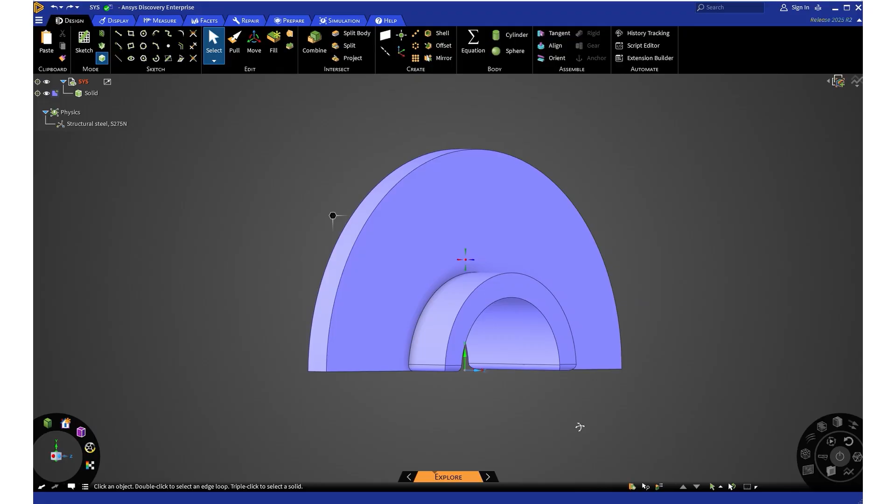In this tutorial, we are going to look at the plastic deformation of a curved beam. Here's our solid member, and we are going to fix one side and apply a moment to the other side to determine the maximum moment that can be applied before the system becomes a plastic hinge, or fully plastic. This is very similar to the problem defined in the textbook Advanced Mechanics of Materials, 6th edition, by Arthur Boresi.

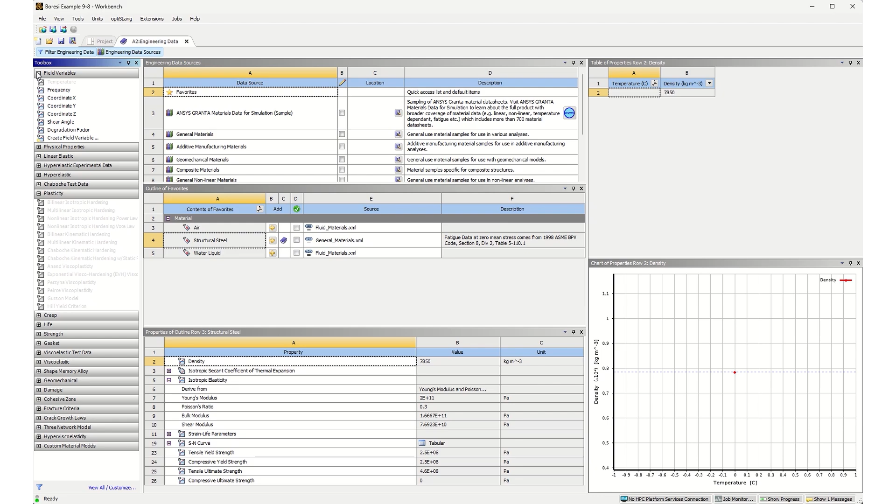To begin, we open ANSYS Workbench and drag and drop a static structural module into the project schematic. Then we double click on engineering data, and I'm going to use steel for this, so I click on steel here. If I want to go to engineering data sources, I can click on that and minimize these windows.

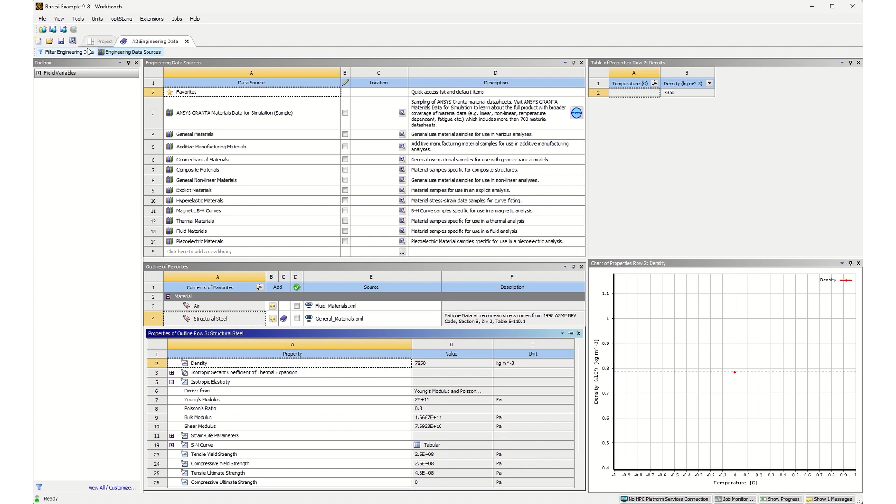You can see that structural steel is the default, and I can slide it and move it where I want. These are the properties in the structural steel. If I want to go back and use the structural steel I've already created, I come back to Filter, unclick Engineering Data Sources, and click on my structural steel, which is the one I have already started to develop.

You can see here that I have inserted a bilinear isotropic hardening model. You do that by coming over to the plasticity models, clicking on it, and dragging and dropping it into the properties outline window.

This I used initially. What you do here is click on the tangent modulus type and select plastic, which is the default. Then you enter the yield strength, matching the tensile yield strength down at the bottom, 2.8 e to the 8. For an elastic, perfectly plastic material, you enter a tangent modulus of 0. This tangent modulus is essentially the slope of the stress strain curve once you've passed the yield strength, so for an elastic, perfectly plastic material we want that flat line, and 0 gives us that flat line.

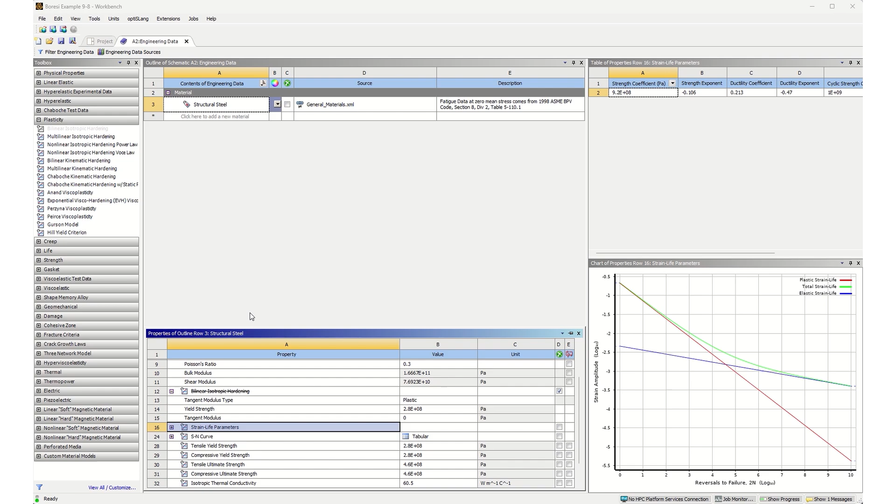If I wanted to go back and use the other one, I could click on it and delete it, or come down to the bilinear entry, right click, and delete that one instead, making it gone. Inserting it back in, I come to multilinear and drop it on, and you can see it shows up with some question marks.

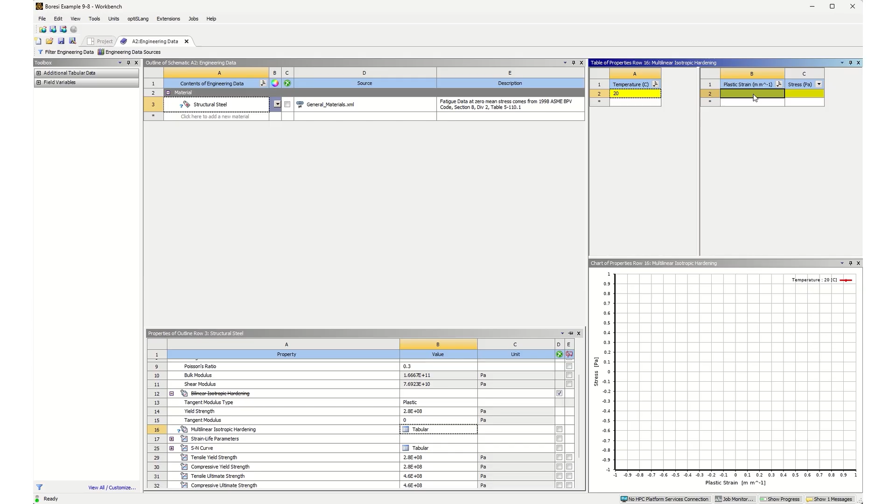Here's the table data, so you click on tabular data. I'm going to enter a temperature of 20 C, then define the plastic strain module. At a strain of 0, I set the yield stress to 2.8 E to the 8 pascals. Then at a strain of 0.1, I have this occur at the yield strength as well, so I type in 2.8 e to the 8. Now I can put one more point in at a very large strain, say 5, and enter 2.8 E8 there too, giving me a little table for my multilinear isotropic hardening.

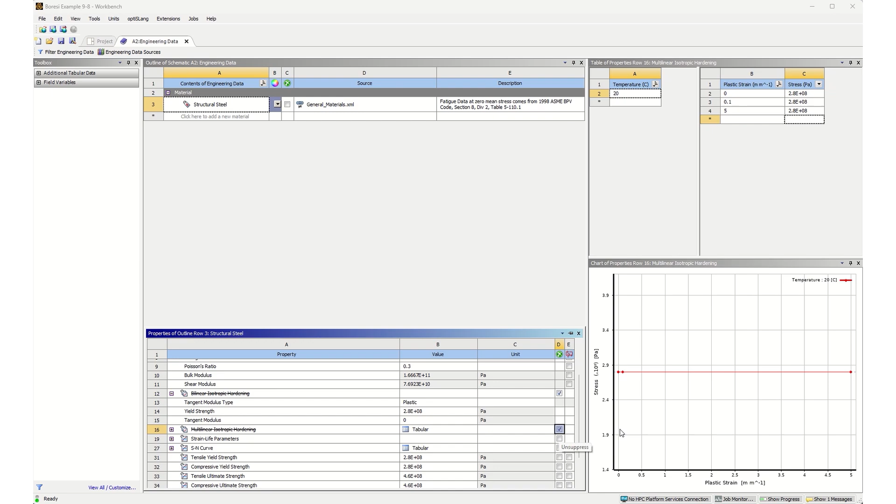You can also come over here and, instead of deleting it, just check mark or uncheck it. Placing a check mark in this column wipes out that module. Since I'm going to use this multilinear analysis and the multilinear model that's been plotted here, I'll go ahead and uncheck that other one.

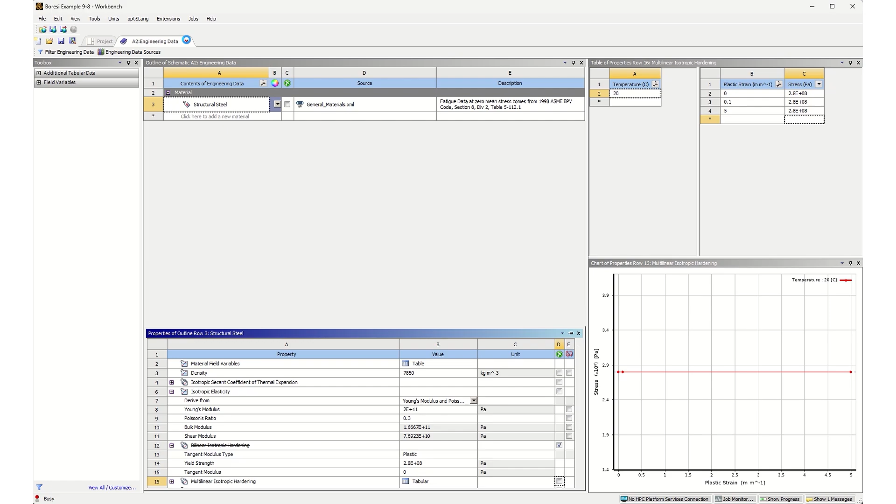Then make sure your other properties are set how you want them. Oftentimes you won't have a compressive ultimate strength, and you may want to enter that in. Other than that, that's about all we need to do in terms of materials. I'll come up to engineering data and close that window, and you can see now I need to resolve or update my model, so I just click update, which will refresh the screen and give me the data and solution I need.

Before we do that, in general we need to create our geometry. To create our geometry, we double click on geometry and ANSYS will open up ANSYS Discovery, and we need to build this beam. So to show you how to build that beam, I'll delete this one and rebuild it.

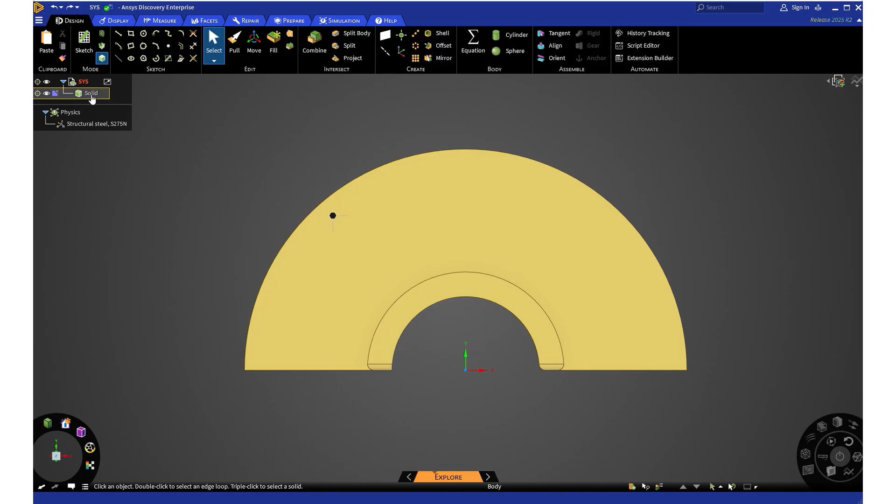To delete the beam, I can come over here and right click on solid and come down to delete, and it deletes the body.

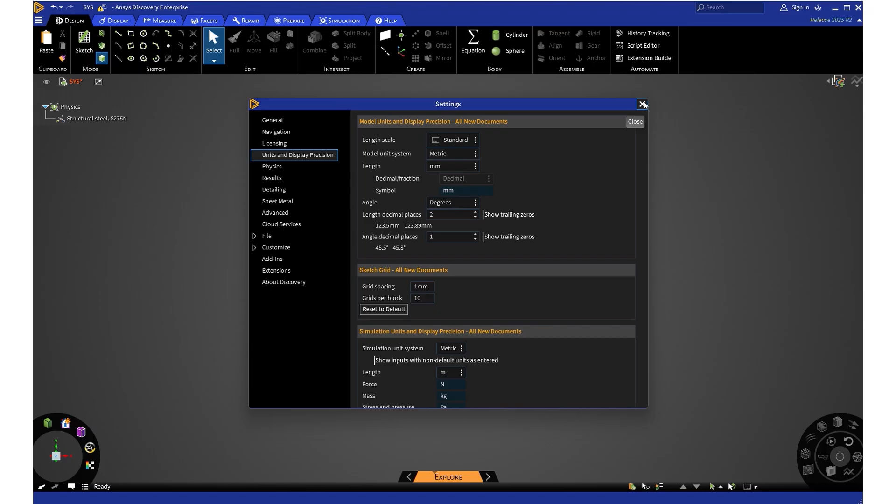To create this body, I will come up to sketch mode, and the first thing you want to do is make sure your units are correct. If you click file, then settings, then units and display, you can see I'm using metric units with length in millimeters, and that's what I want to use. That sets up the default for all new documents. Now for the document you're in, come down here and click on this icon, which sets the model units for the specific model you're dealing with. So here I'm using, again, metric.

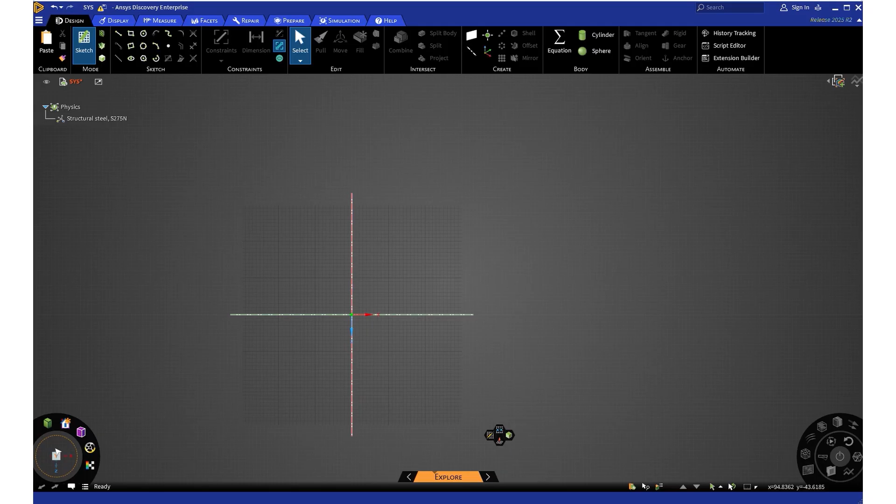Now we're ready to start to sketch, and it's often good to see the sketch plane. If you click on sketch mode in the sketch plane, you can see these sketch planes. For this model, I'm going to switch sketch planes to the XY plane, sketch the cross section, then rotate it about the Z axis. As I move my cursor around, you can see the sketch plane changing planes.

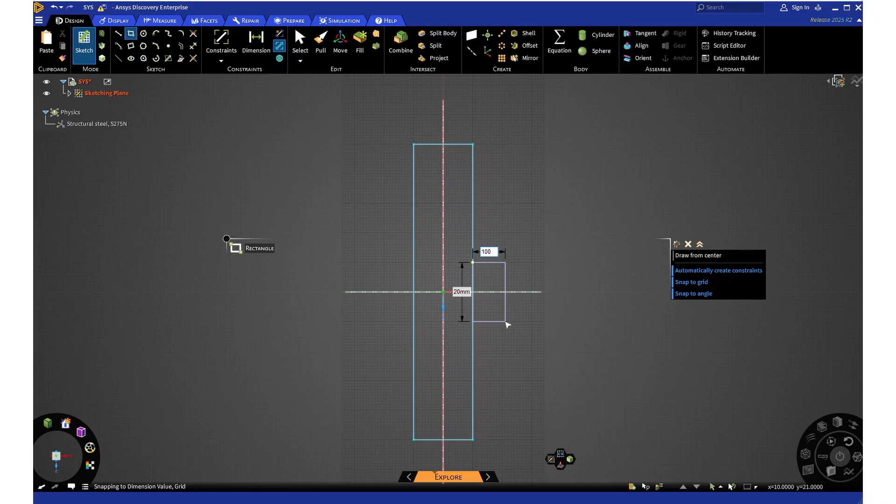I'll click on draw from center, then click the center, and this starts to expand. I want this length to be 100 millimeters, so I type 100 and tab. Now it comes down to the next dimension, and I'll make that 20 millimeters - 20, enter. There's part of my cross section. Now I'll come back up to rectangle and create another one, starting 10 millimeters up here and coming down to here. You can see that's already 40 wide because I'm still on draw from center, so I'll hit escape, then click on this icon and draw again from center.

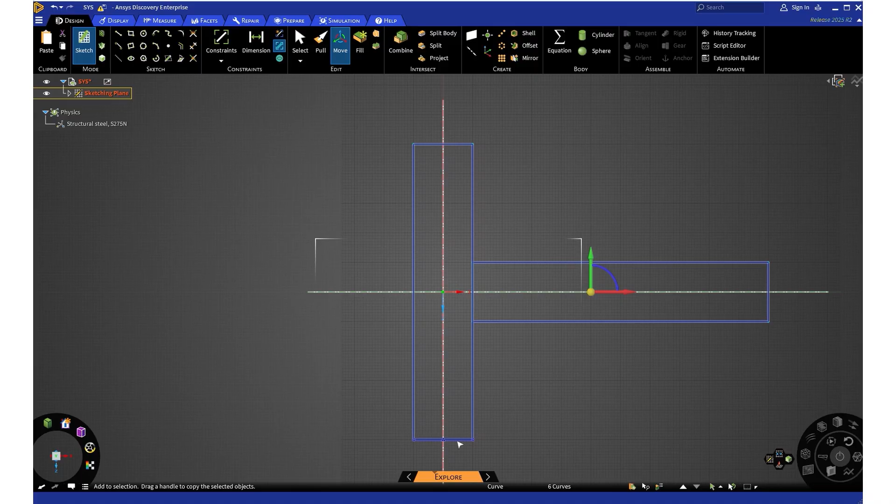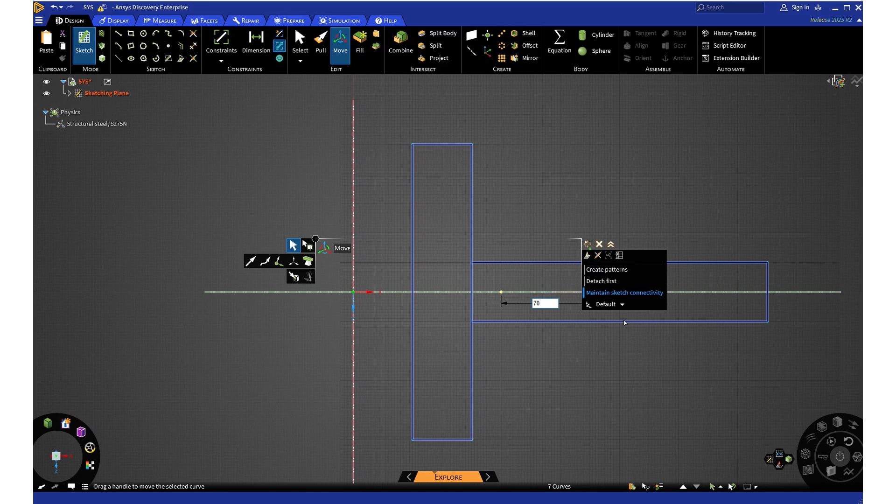Now if I come over and click on not draw from center to unclick it, I can click up here and come down to 20 millimeters, or type that in - 20, tab, and this one I want to be 100 millimeters as well, so I type in 100 and enter. There's the cross section to that point. Now I want to move this so I can rotate about the z-axis. I'll come up to move, then click on these lines - click the first one, then control click, or box select to select all of them at the same time.

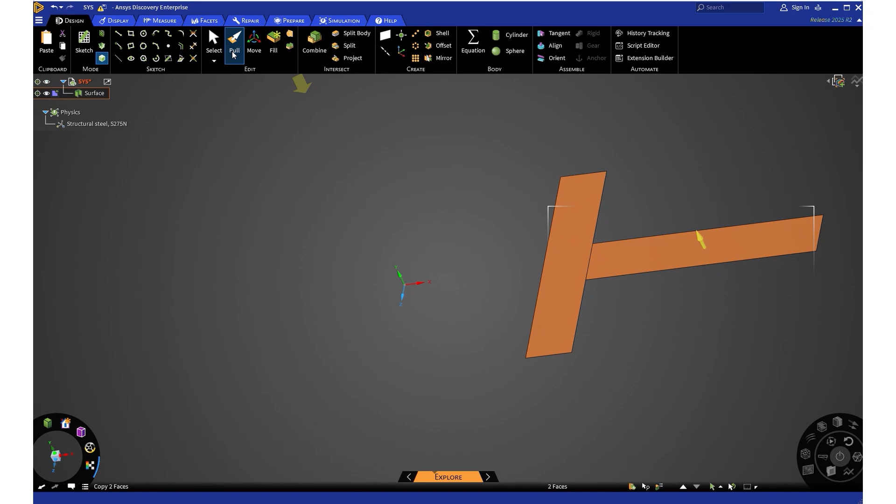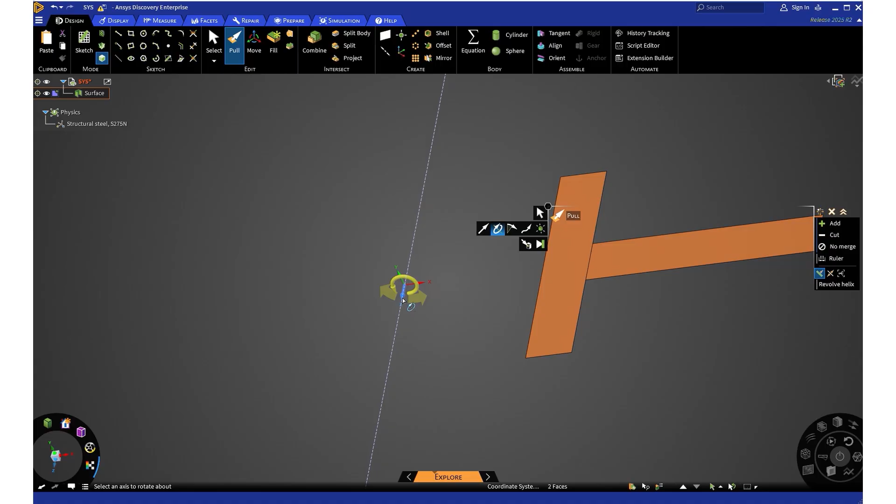Now that I have all of them selected, I can control click to move that, grab my arrow, and move the whole thing, entering the distance I want to move this - 70 millimeters. So I'll click 70, enter, and now it's been moved that far. Now I can middle mouse button and rotate around to look at rotating this cross section about the z-axis. To rotate it, I'll come up to the pull command, left click on this body and control left click here. Now that I'm on pull, I want to make sure I pull this around a rotation. When I let off the control button, these icons show up, and I click on the revolve icon, then click the axis I want to rotate about. Now I can rotate my body and type in 180 degrees, and my cross section has been created now. I can scroll in and out, orient this along the z-axis, and that's the body I'm looking at.

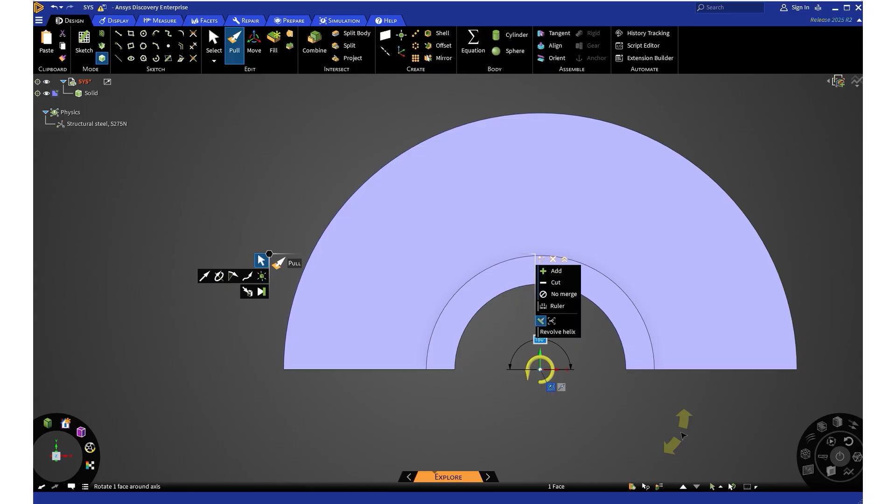You are ready now to save this and go into ANSYS Workbench. Coming back to here, now I can double click on model and open up my model, and I will be in ANSYS Mechanical. One other thing I've found helpful when doing this particular problem is to come in and round some of these edges so that you reduce the stress concentrations.

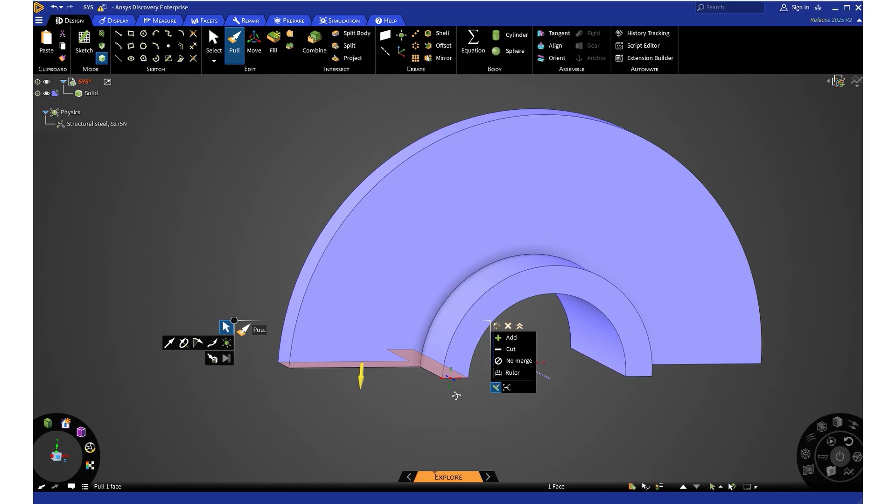On this particular one, if you come to the pull command and click on this line, you can click on it and rotate the whole thing around. If that's not what you wanted because you selected the face instead of the line, just hit escape and come back and click on the line.

When I click on it, I can see the line and scroll it in and out, and type in the dimension I would like. I might set this at a radius of 5 millimeters. Then I would click this line as well, making sure I get the right line, hit the arrow, move it in, and type this in as 5 millimeters as well.

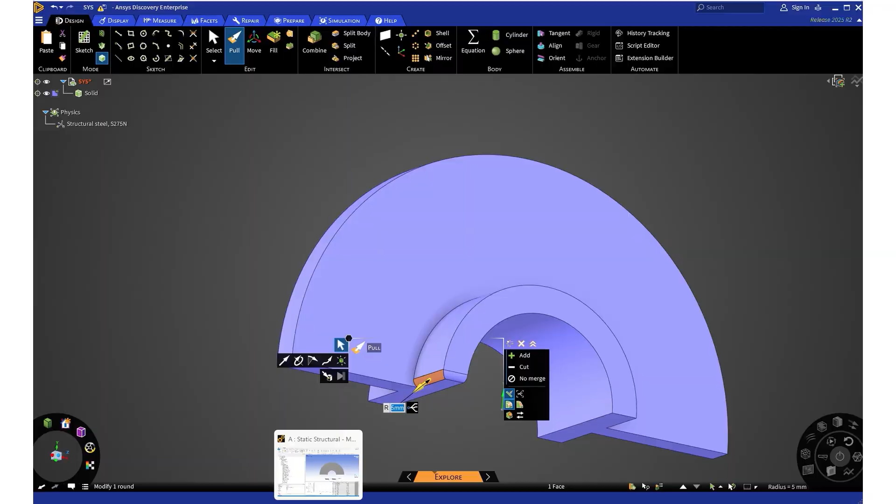On this particular problem, I rounded these two edges and then the equivalent edges on the other sides of this same beam. Then you can bring that into ANSYS Mechanical. Clicking on Mechanical, this is the body that I have, and you can see these edges have been rounded. I did not put a fillet in between here, but you certainly could, to reduce some stress concentrations that will likely develop in this region.

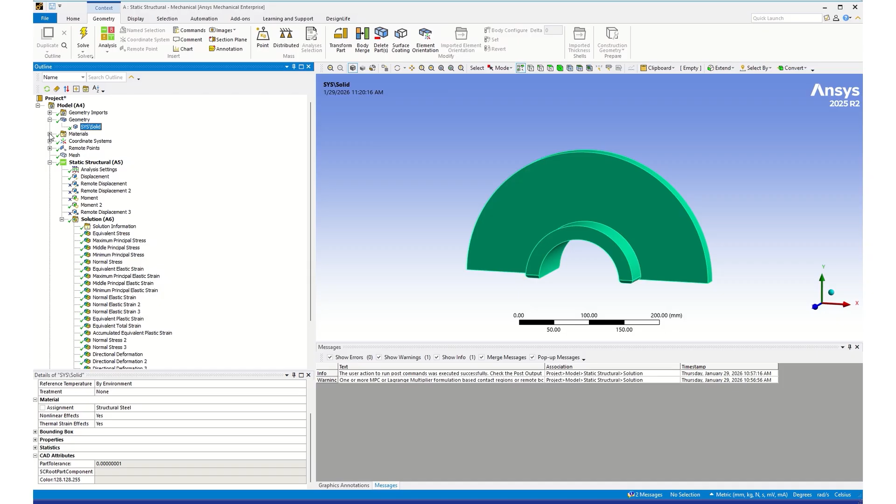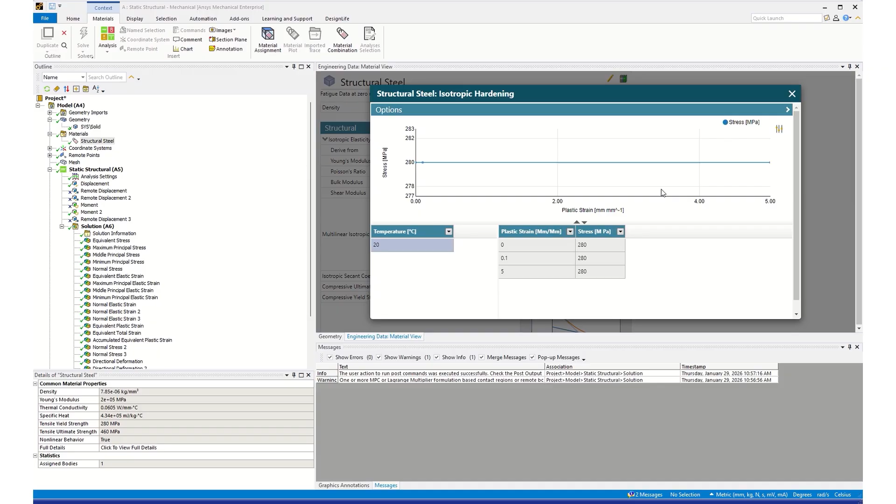The next thing you'll do is come over to geometry and make sure your system came in using the material you defined. Then click on materials, open this drop-down menu, click on your structural steel, and double check that your multilinear isotropic hardening is shown as your material model. You can click on this graph and it will show the data points you entered—here are the 3 values I entered. Those look correct for my model.

That's all we need to do to this point. Now we're ready to define our model and mesh it. If we click on mesh, we can see the mesh I developed. This mesh came up with tetrahedral elements because of these rounded edges. If you don't round or chamfer the edges, you'll get a really nice brick mesh.

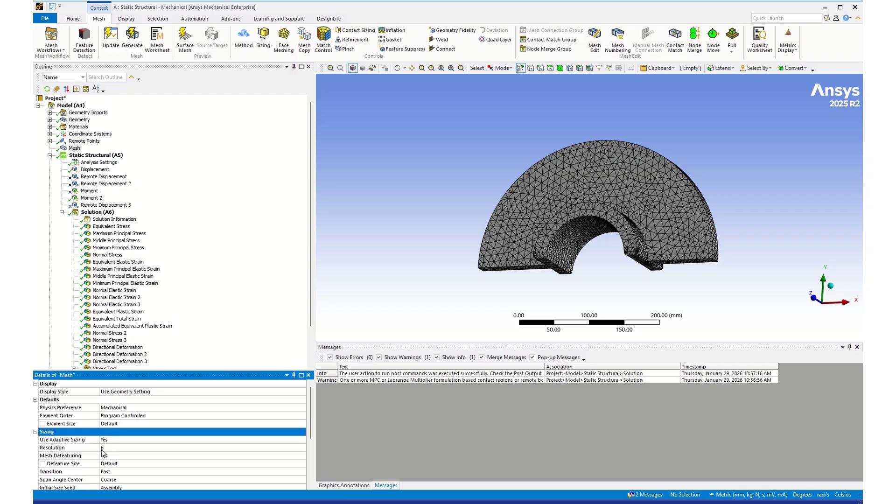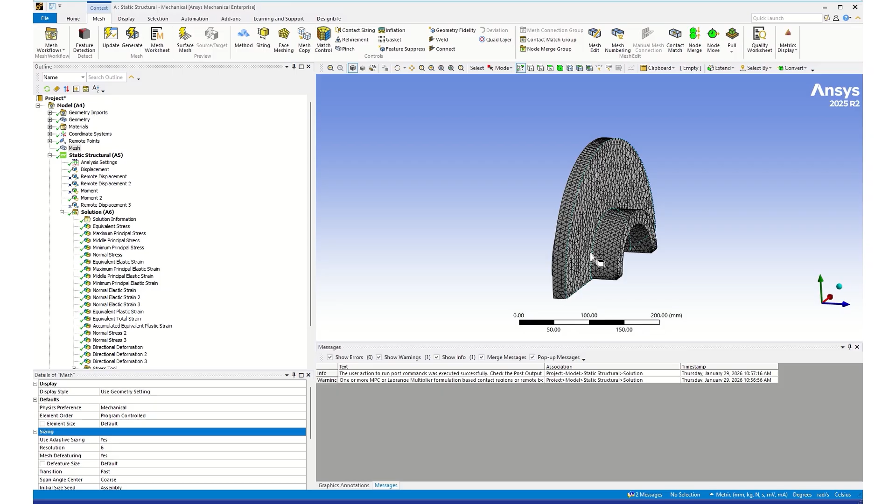You can see on my mesh I went to sizing and increased the resolution from the default value of 2 to a value of 6 to obtain this mesh. Now we're going to load this into the plastic region, so we want at least 3 elements going across the width—this would be better with even more elements. If I were doing this problem for real and needed good results, I would use a finer mesh than this, since we're going fully plastic. For now, this is the mesh I'll use, so you can go ahead and mesh it.

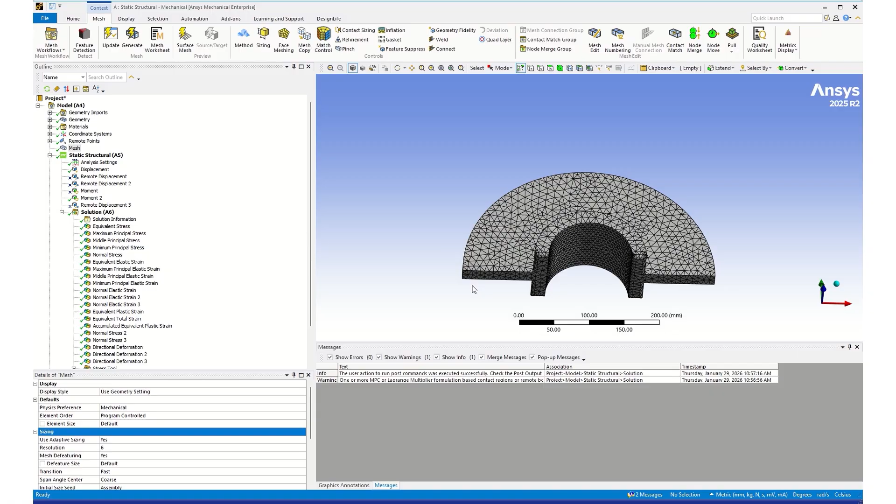Now, when we look at how we're going to load this thing, what I'm going to do is place a fixed boundary on this face of the beam. And I'm not going to use a completely fixed boundary—I'm going to use displacements of 0 in all directions.

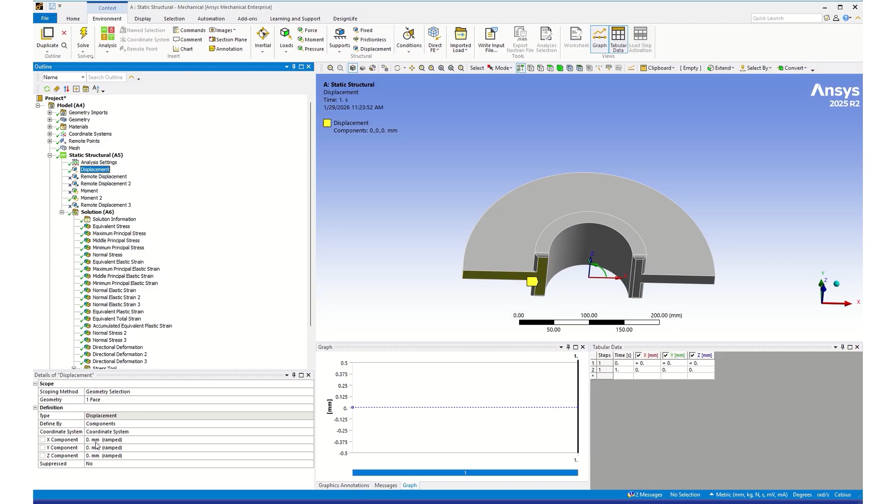So I'll come over here to static structural, click on that. It brings up this environment window, and I can click on displacement, which drops in this displacement here. You can see I've selected this face, and I've set all the displacements in the X, Y, and Z directions to be 0. That should constrain my body enough to get a solution.

The next thing I want to do is consider how I am going to apply a moment or a load to this curved beam—and I guess it's not cantilevered since we just fixed displacements here. But I can apply a moment here, I can apply a force on this face, or I can apply a displacement. We know that in general you typically get better results going into the plastic range by applying displacements; those answers usually converge better than applying forces and moments. However, in this first example, I am going to apply a moment.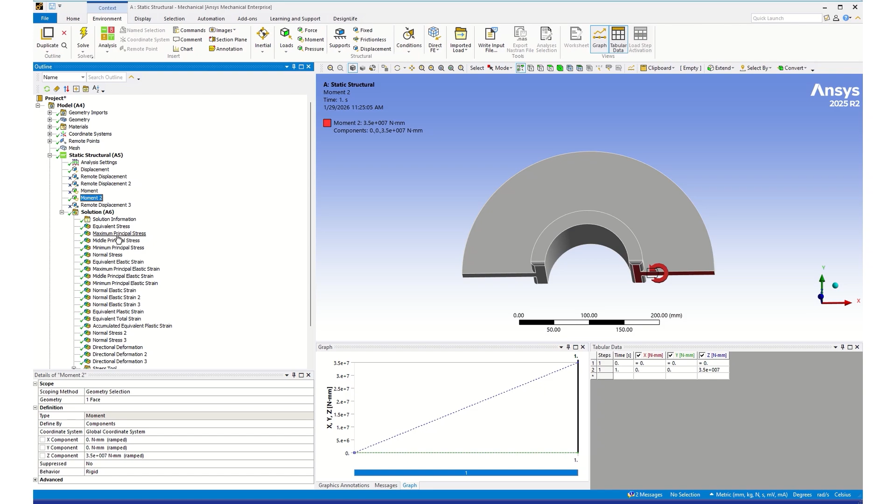So if I come up here to loads, I can click on moment, and it will drop my moment in here. I can click on that—you can see I've selected this bottom face, and then clicked on components instead of vector, and entered a moment about the z-axis of 3.5 times 10 to the 7th. I can click over here on the z-axis and look at my beam straight on.

So if that's all that you want to do for loading, then we're done.

Coming up to analysis settings, when we're doing a plastic model, I actually like to turn auto time stepping off and insert the number of substeps that I want it to break the load into.

If you leave auto time stepping on, you have the option to enter in various controls. So if I turn it on, you can see that I can enter in the initial substeps, minimum substeps, and maximum substeps. But with auto time stepping on, ANSYS does its own thinking. Even though you have prescribed these values here, ANSYS will break up the load into the steps it thinks are best. So to have complete control, you need to turn the auto time stepping off and then set the number of substeps that you would like to have.

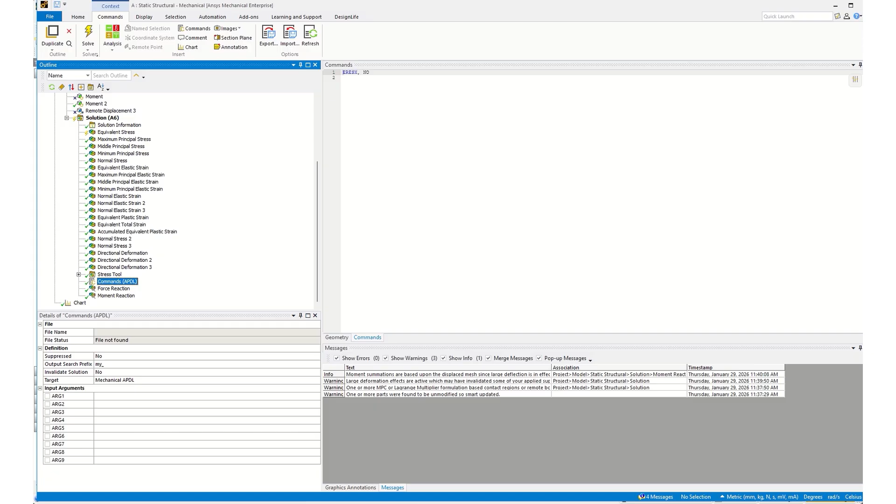So make sure that you come down here and on the display, you click the drop down and use elemental mean. This command down here that we talked about, the ERESX, that's a command that lets us copy the integration points directly to the nodes rather than extrapolating them. So the values are not extrapolated from the Gauss points to the nodes, but they're copied directly to the nodes, giving us a better result or a better representation.

So when we come here to look at equivalent plastic strain, we can see that most of this material, if we come up and click on probe and move our cursor over the structure, most of this material has not had plastic strain occur. Down here at our boundary, we get a little bit, and over here on this edge where we applied the moment, we get some.

However, we know that our model has developed a fully plastic hinge, again from our load deflection plot. So even though our equivalent plastic strain plot shows that it is not fully plastic, we've hit that load based on a force or load deflection plot. ANSYS is not able to compute plastic strain unless your stress goes over the yield strength. So where our equivalent stress is essentially at the yield strength, ANSYS does not compute that as plastic strain. And so using the plastic strain to see that you have completely gone plastic is not effective and is not the right way to do this.

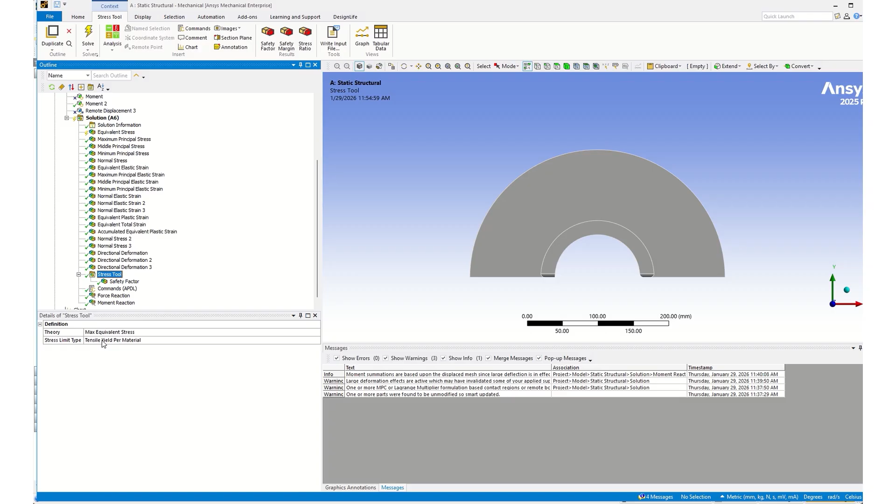The other thing you can do is enter a stress tool. On the stress tool, if you click on it, you can see that the theory I'm using is maximum equivalent stress, and I'm using the tensile yield for the material. When I click on safety factor, you can see that throughout most of the body, the safety factor is greater than 1. Only at a few hot spots, these red hot spots, would our safety factor be less than 1. So again, this is very misleading in that it shows that we still have a large safety factor and we haven't failed.

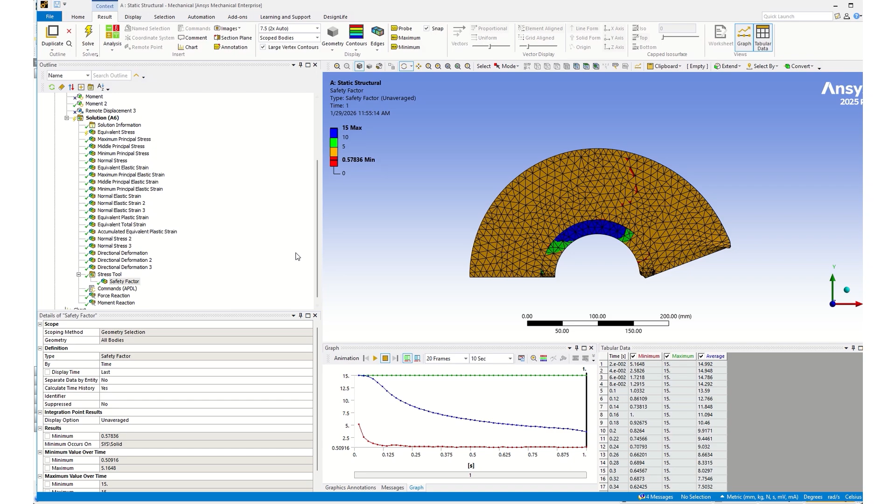The telltale result is to come down here and plot the load deflection curve and see that we cannot apply any more moment without just gathering extremely large displacements. So this was based on this load condition. We got a load or a maximum moment of 3.5e7. And you will note in the solutions for the Boresi problem, example 9.8, the hand calculations gave a value of about 3.3e7. So this matches the hand calculations for a curved beam very well.

We will now go ahead and look at some of the other loading conditions and investigate those results.

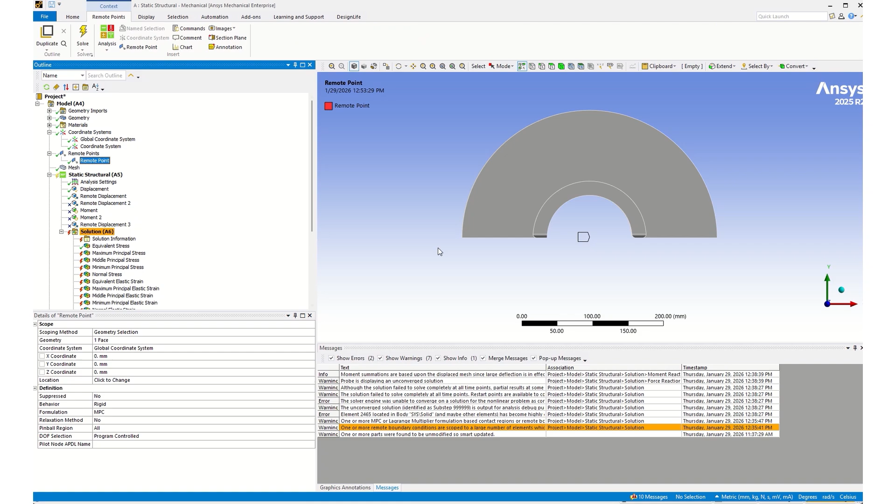In another loading case, I inserted a remote displacement about a remote point. To do this, go up to Model, right-click, Insert, and scroll down until you see Remote Point. Click on it, and that will insert a remote point right here. You can click on this and see that I placed that remote point at the center of the beam.

Now I can click on Static Structural, then come to Supports and click on Remote Displacement to insert this remote displacement. When I click on remote displacement, I have a geometry selection and a named selection option, but I'm going to set the scoping to the remote point. I only have one remote point, which I left named Remote Point, so I'll put the remote displacement there.

All of these fields are grayed out because I've already solved the problem and have a solution based on these values. Note that I'm using a global coordinate system, and I placed this remote point at the 0,0,0 position, right at the center of the beam again, which is the location for this remote displacement.

I come down here where the type is set for remote displacement, and I can set all of these boundary conditions. I set everything to be free except for the rotation about the z-axis, which is 12 degrees. I also set it to rigid from deformable so that the face remains as it is.

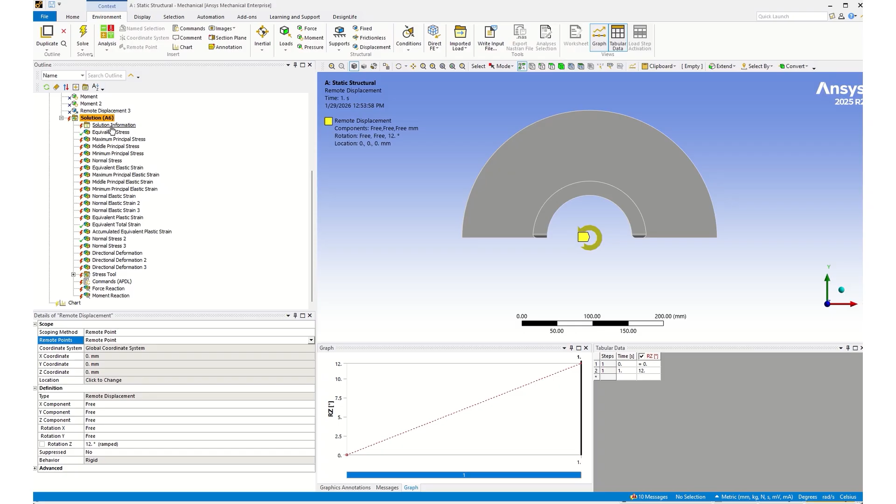When you do that, you get this picture showing your remote displacement acting about the z-axis at the centroid of your body. When you solve this, you get a solution on equivalent stress, equivalent total strain, and normal stress in the y direction. I did not converge to a solution on any of the other components.

If I click on equivalent stress, you can see that much of my body has now reached the 280 yield strength, while some out here is less than that. Right around the joint where the two cylinders come together, I have red all the way around, so this looks pretty close to plastic deformation based on just the stress.

If I look at my load deflection plot, I click on the outline selection and make sure I have my moment reaction and directional deformation still selected. You can see in this plot that as I increase my moment, it's still increasing, up to 4.7 E7.

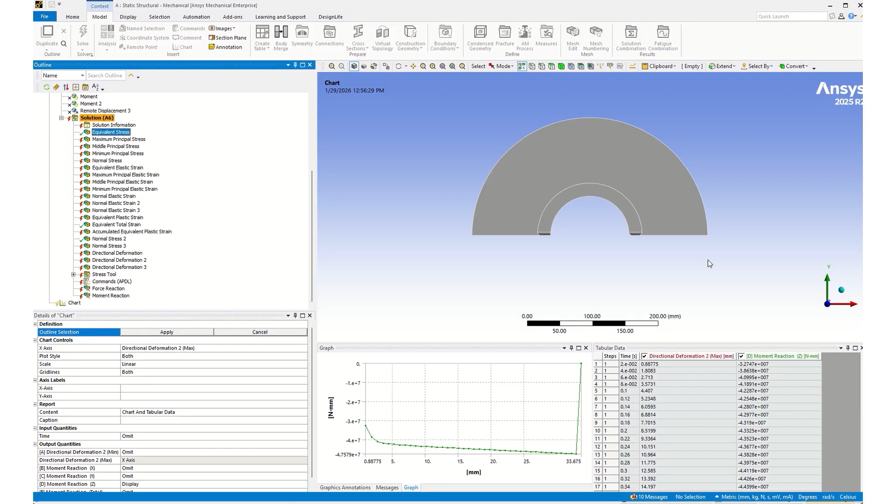Which is significantly higher than the moment we had before. Then at this point, all of a sudden we have a huge jump, indicating that we can't apply any more moment - we've hit our plastic limit. If you click on equivalent stress again, you can see that my model has hung up, so I'll need to close out and come back in.

So now I'm back up. I can click on equivalent stress again, and you can see that the angle has been taken from the center of curvature here. So here are the displacements coming around in a radial direction based on the center of curvature.

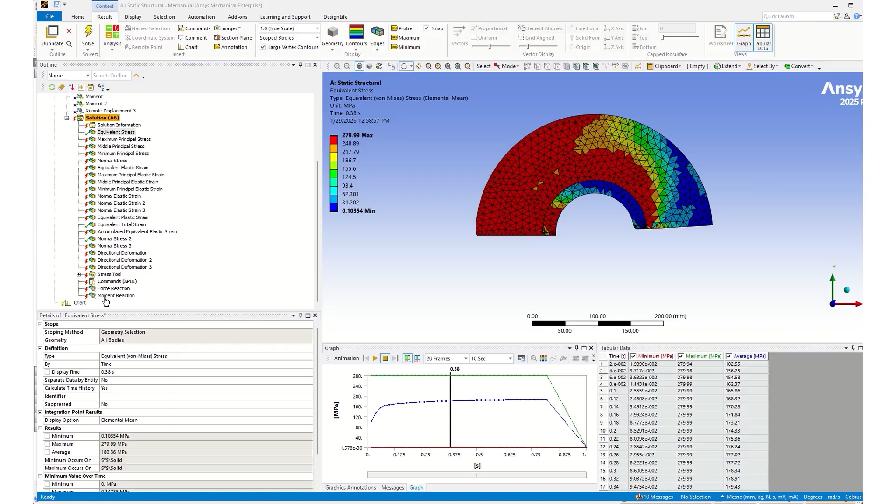If I come back down to the stress tool and look at the safety factor, you can see that my safety factor doesn't make a lot of sense. Down here, I'm essentially less than 1 for the minimum safety factor. My maximum is still very high, but this doesn't really help me determine plasticity until I get to the very end, where I see a sharp jump down to 0 in all the safety factors.

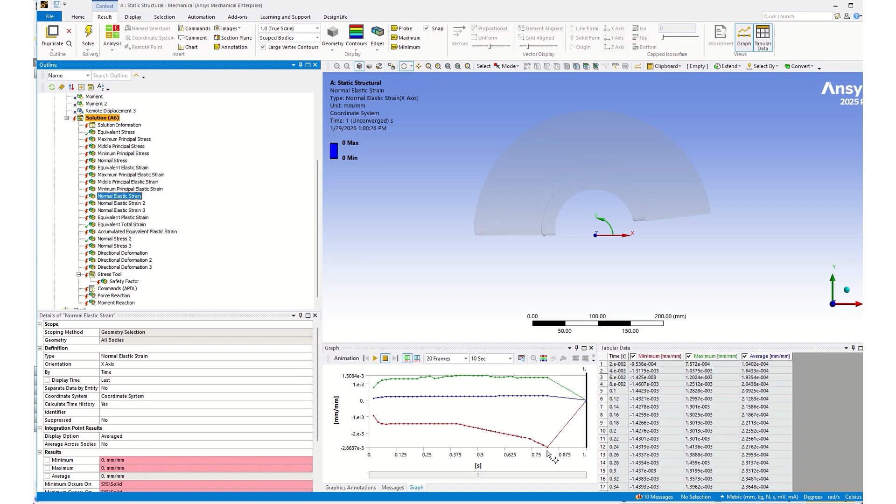I can also click on equivalent plastic strain and these other quantities. Looking at the equivalent plastic strain, you can see I'm coming along and then there's a very large jump. If I look at the normal elastic strain, you can see I've hit a maximum and then there's also this jump, so I can click on that jump.

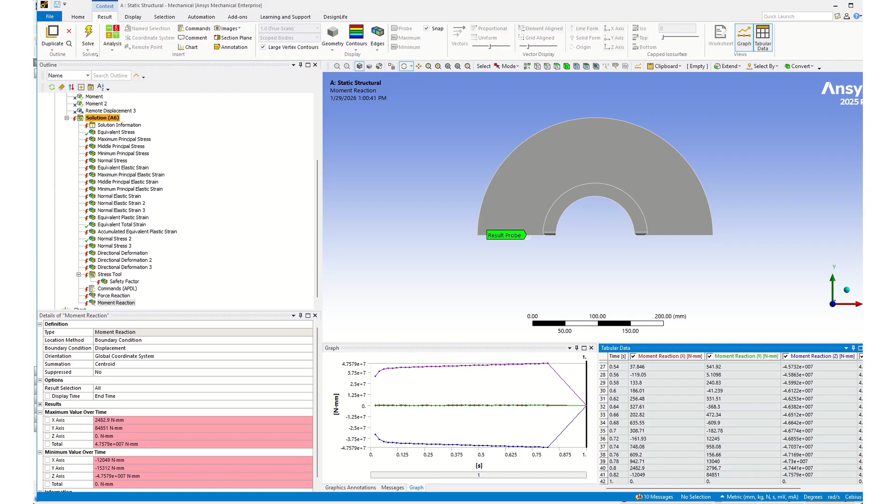I see it's at time step 0.82. So if I go back to my moment reaction and scroll down until I hit 0.82, I can see that my moment about the z-axis was minus 4.7 E7. That would be my fully plastic moment based on the moment being applied from the center of curvature in this beam, and that number was quite a bit different than placing the moment here. This moment might be more realistic in this model, but to match theory, applying the moment right on this face matches theory better, which is why our previous answer matched the theoretical results and hand calculations better.